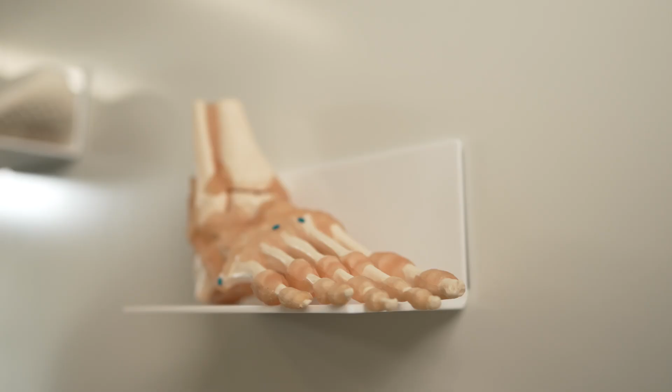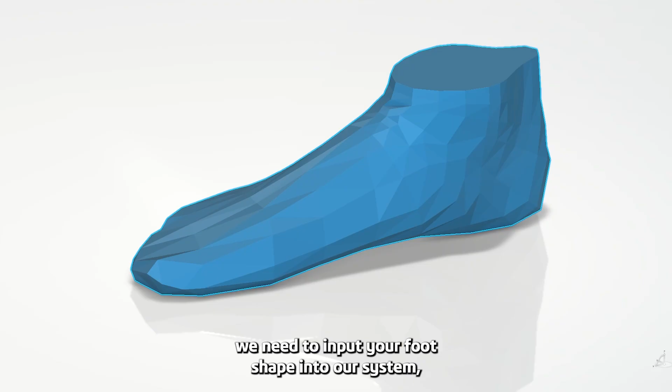Can you give me some details about the overall process and how you use our solutions in CATIA? To achieve the personalization, we have to do quite different things from mass production. For example, one of the big challenges for us is automation, because if we would like to make an insole for you, we need to input your foot shape into our system, but we don't want to manipulate it every single time. So we need a very robust and fast automatic process on the platform. In addition, we are working together as a team, so we need to collaborate very intuitively and quickly. That's the reason why we wanted to use the 3DEXPERIENCE platform on cloud.

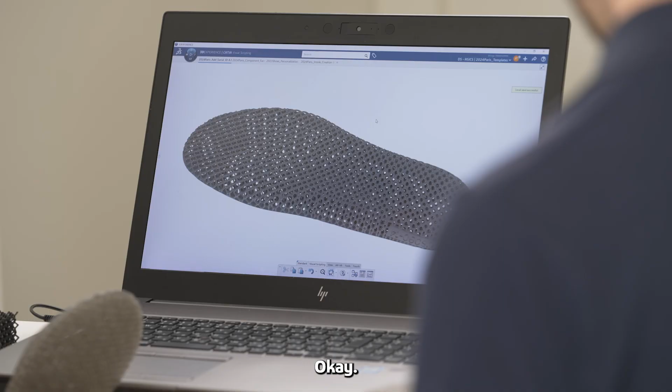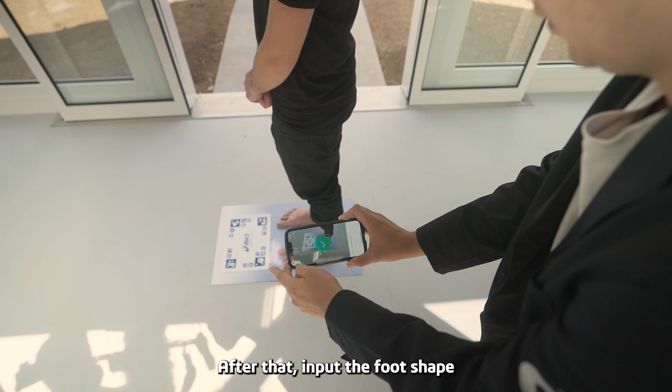So to get this insole, first we begin with capturing your foot shape. With a scanner or something like that? To be honest, we developed our own capturing system with a mobile phone, so you can capture everywhere, every time you want. After that, we input the foot shape into CATIA.

First, we convert the foot shape from the standing, deforming foot shape into the unloaded and undeformed foot shape. Insole should be supportive for the foot, so we don't want to imitate just the foot shape, but we need to make a neutral position of the foot shape, and then we can support the shape with deformation in movement.

Even this, we do CATIA using visual scripting, thanks to advanced UI technology.

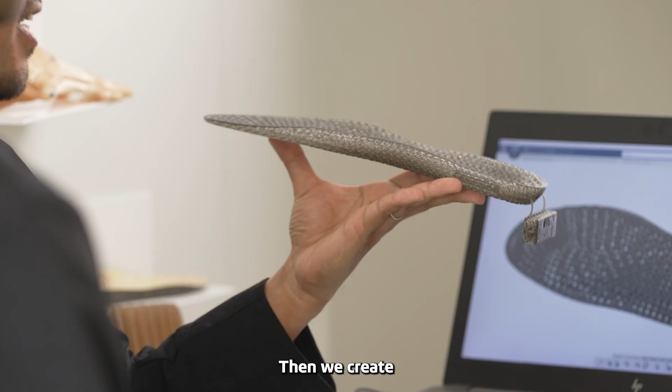Based on the foot shape, we create the outer shape of the insole. Then we created each bar using lattice design, and we put radius settings for each bar in the visual scripting. Then we generate the 3D solid shape of the insole, ready to be 3D printed.

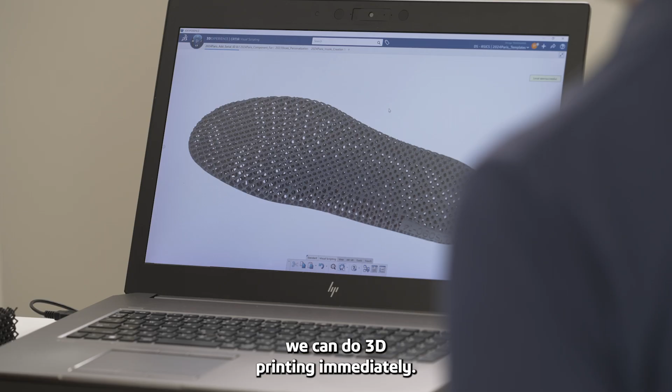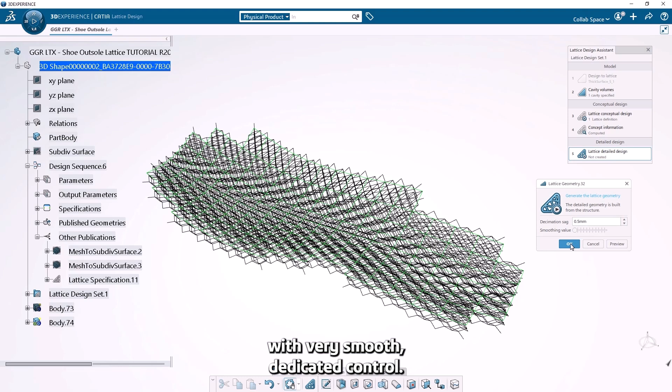After creating the 3D model, in this studio we can do 3D printing immediately. This kind of lattice structure is very sensitive, so we need to control the thickness very precisely. An increment of 0.1 millimeter has a big impact on the feeling and function, which is why we need very smooth, dedicated control. Lattice design helps us a lot in controlling these lattice bars.

So if I summarize: with my smartphone, I will scan my feet, then build a reference model. Then we generate the surfaces, generate the network of bars, generate the lattice geometry, and go to 3D printing.

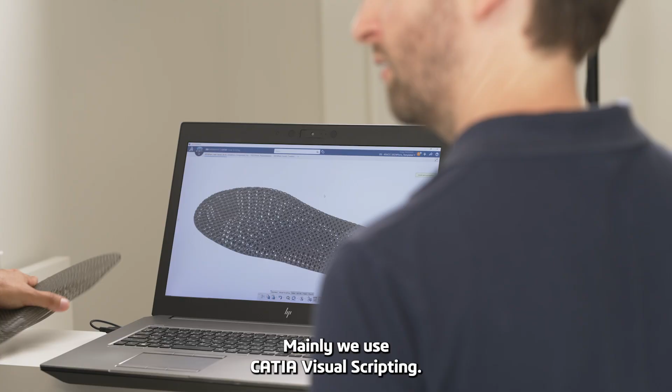And for that, you used CATIA visual scripting. Yeah, mainly we use CATIA visual scripting. Let's take a look. You can see this part—I think it's easy to understand what we do in CATIA. Let's take this part, for example.

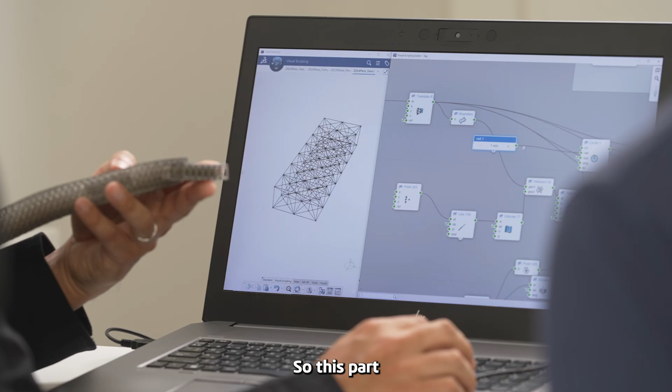So here, this is a network of bars. First, we define the target volume to fill with lattice bars. This part is the algorithm to generate it, basically for the definition of the target volume, in the Y direction and X direction like that. After creating the volume, we put the lattice bar like this.

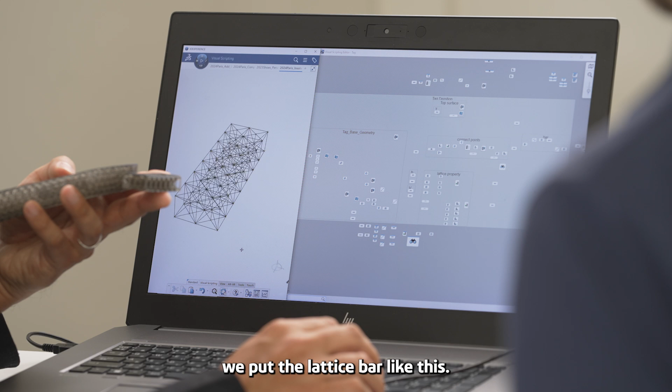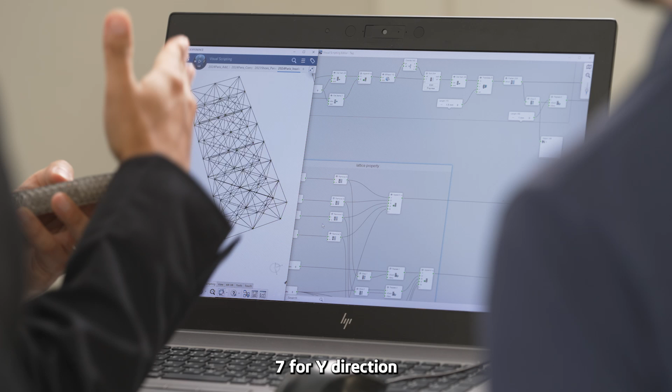To do that, first we divide this volume like a voxel, and we can divide each part—in this example, 7 for the Y direction and 2 for the X direction. After that, for each voxel we put a line. We can easily increase the number of voxels, and we can easily change the type of lattice bar, thanks to the algorithm.

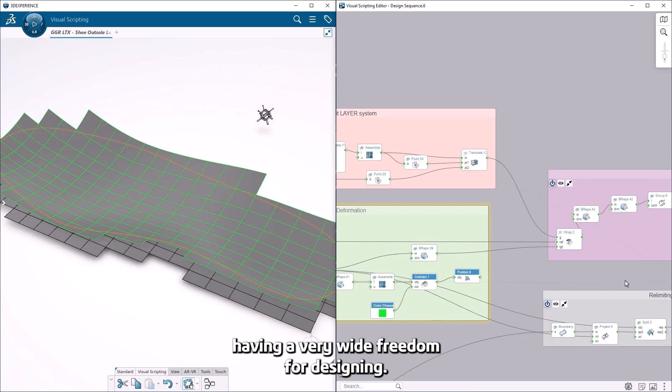We are actually working on the same data as a collaboration, using the same language. I feel like this kind of visual scripting has very wide freedom for designing—not only the design itself, but the shape of the script itself is also very free. We have a very similar language, so it's easy to catch up on the script. Thanks to visual scripting, we can easily share our mindset, the way to create a 3D model. It's very interesting and amazing.

Like you said, it's kind of a language, in fact. Yes, a universal language. And we can reuse our know-how from one project to the next, so this is a very important asset for us now. This is the CATIA component family.

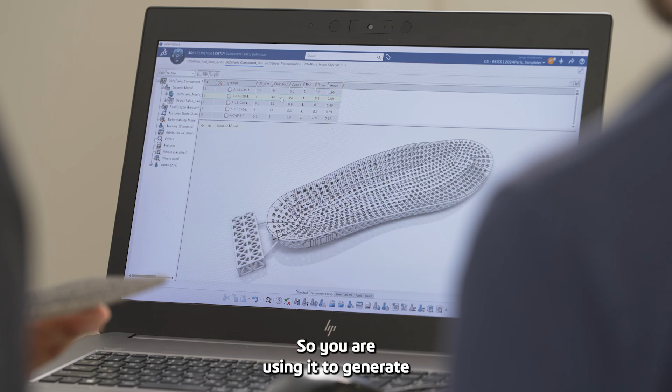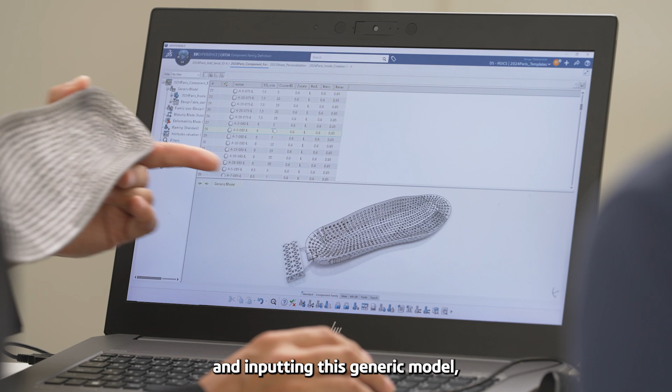You are using it to generate different models. Once we create one generic model using visual scripting, that model can automatically create several types of insoles using the component family. We want to create an insole list like that—using these parameters as input into this generic model, we can automatically create insoles for manufacturing. It's really impressive, saving time on manipulation so we can focus on the next step using our brain. This is very important.

So guys, what's the next step of the tour? I will send this data to 3D printers. Let's go see our production room. I will follow you. Okay, let's go.